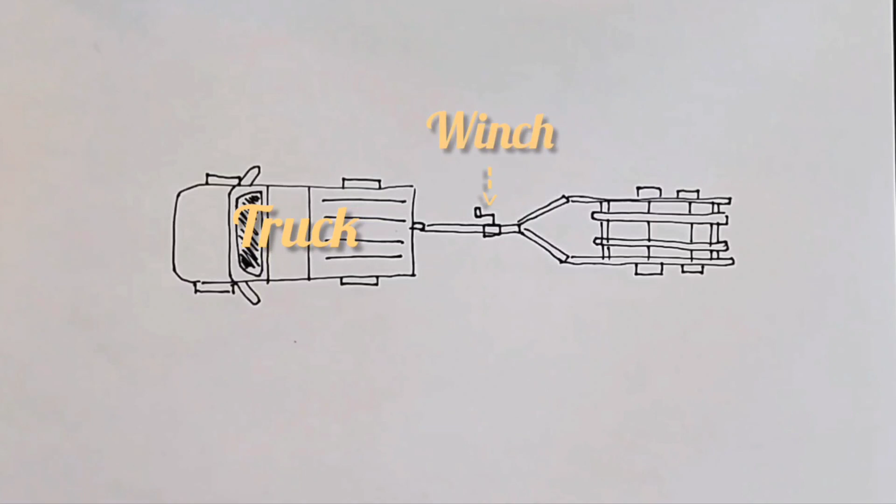Alright, so this is a quick attempt to draw a truck and a boat trailer from the top. A lot of people keep asking me where I got the design from for the hull. Well, the basics are inspired by Roy Schreier's tiny houseboat on YouTube, which I mentioned before in an earlier video, but then I had to change it by quite a bit to suit my personal needs. The square footage was based on the maximum width I can transport legally, minus 6 inch as a buffer, which turns out to be 8 foot.

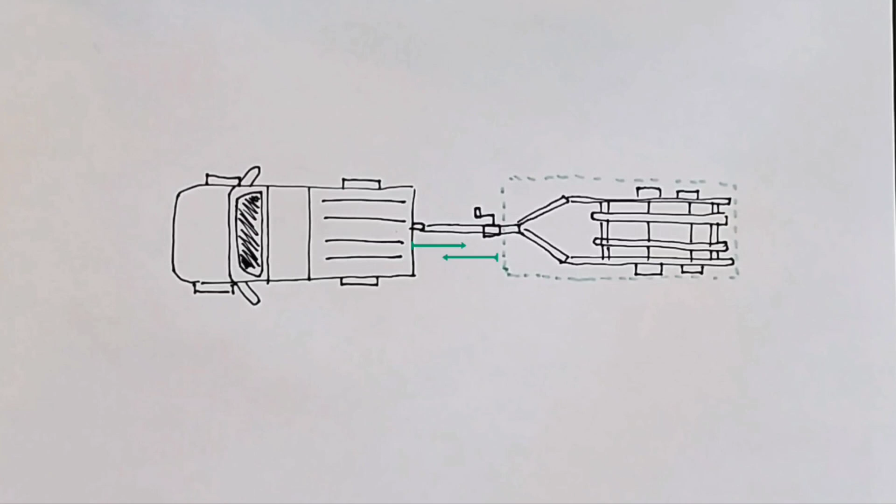And the length has been defined by the length of the trailer ending right at the winch, which happened to be just over 18 feet. Now after looking at this, I realized that there was quite some space between the winch and the trailer hitch of the truck, so I figured out how much of that space is really needed when you turn, and then I added the two noses to the left and right of the winch in order to utilize even more space.

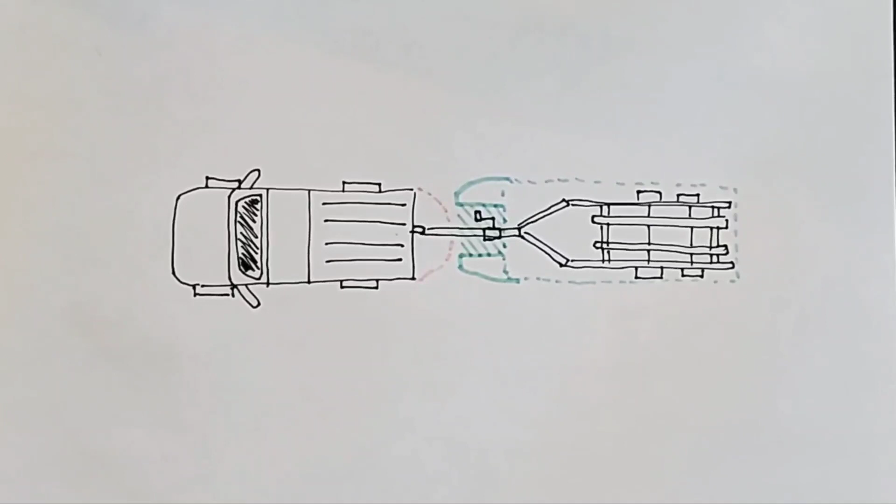And the plan was always to be able to deploy some sort of platform between the two noses once the boat is launched to create a small deck. And that plays an important role in the design of the front door.

Now, one of the ideas I had years ago was, instead of building one big door, building two doors, an upper and a lower one. The lower one acting as sort of a trap door, and once folded down, it can provide a platform at the same time. I scrapped that idea rather quickly because I realized I also want a window in there, and unless you use a couple inch thick bulletproof glass that weighs a ton, you won't be able to step on that.

I also couldn't build a swinging door or two swinging doors for that matter, because I had to extend the opening over that angle here in order to step out without bending down. The only thing I had left in mind was a door that is hinged at the top, but at almost 4 foot wide and over 6 foot tall, that door would have been pretty big, would have looked a little bit awkward, and might have even acted as a sail, and that was not really my intention.

But I simply forgot about it until someone left a comment bringing up again the idea of a trapdoor. Now I put my mind to it, and I think I found a compromise.

Before I could start though, I had some epoxy work to do. I'm using the 406 colloidal silica filler from West System to create a strong and smooth adhesive, and I put just enough in there to get a sag-resistant consistency. Now the plan here is to create a raised edge around the door opening to keep the water out. For that I glued on some strips of marine-grade plywood all the way around, and then I made sure to soak all the edges generously with pure epoxy to seal them.

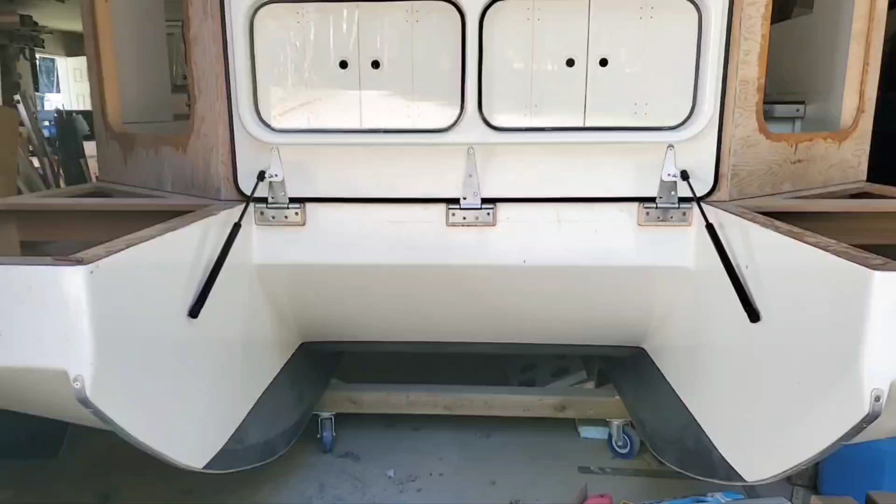Well, there you have it. The lower part of the door is done. I managed to pack a door, a window, and a platform all in one.

One detail that is worth mentioning is the way I hinged those window covers. First I used standard metal hinges, but I ran into some alignment issues pretty quickly. Those little screws that I used as pins to run in the aluminum track, they haven't been quite on the same level. So I experimented around and I ended up using this very thick, clear Gorilla Tape. It turns out it works perfectly as a continuous hinge. I'm sure when it comes to lifetime I won't be able to compete with a standard metal hinge, but in this particular situation I guarantee it will last many years and it couldn't be easier to replace in the future.